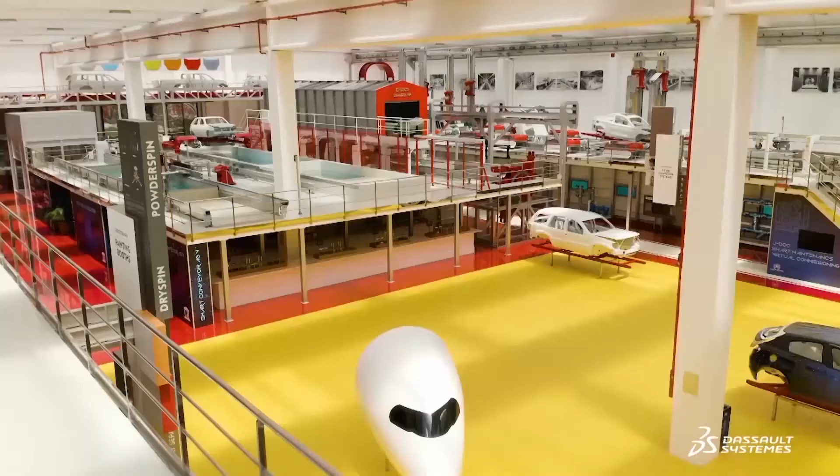Geico is a company that operates in the automotive industry. We are a turnkey provider of paint shops for automotive car bodies. Geico has been in this market for many years, for 3 generations, and one of our main aspects is innovation. We believe strongly that in order to bring value to our customer, we have to always innovate and bring new solutions to make our customer's life easier.

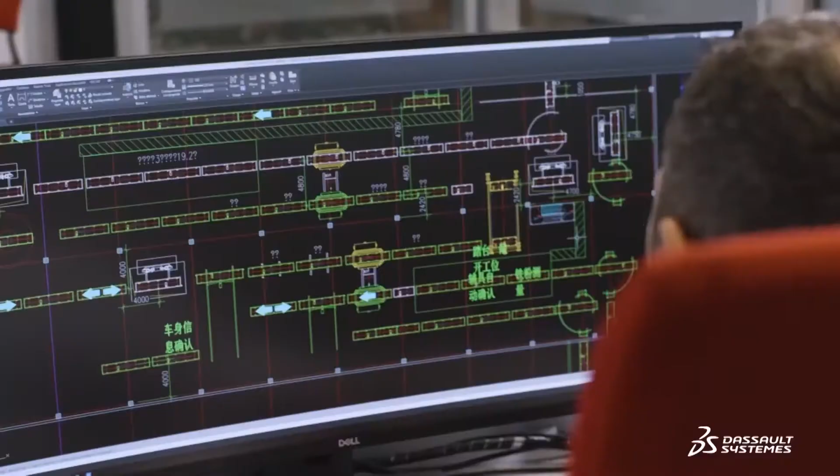This means, especially in the last 3 years, coming up with new strategic projects. In this case, particularly, we are talking about our Smart Paint Shop project. As everybody's talking today, Geico has also decided to invest a lot into the concept of Industry 4.0. What we did is analyze and check all around the world, in many other markets, not only automotive-related technologies that can be considered useful for this concept of Industry 4.0.

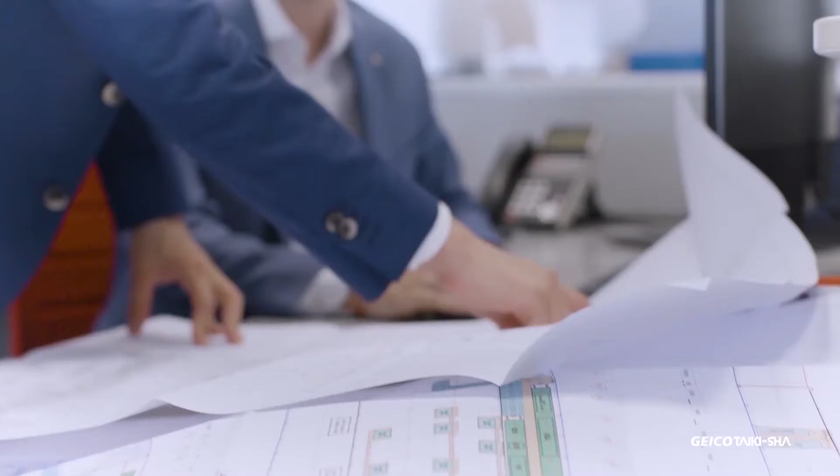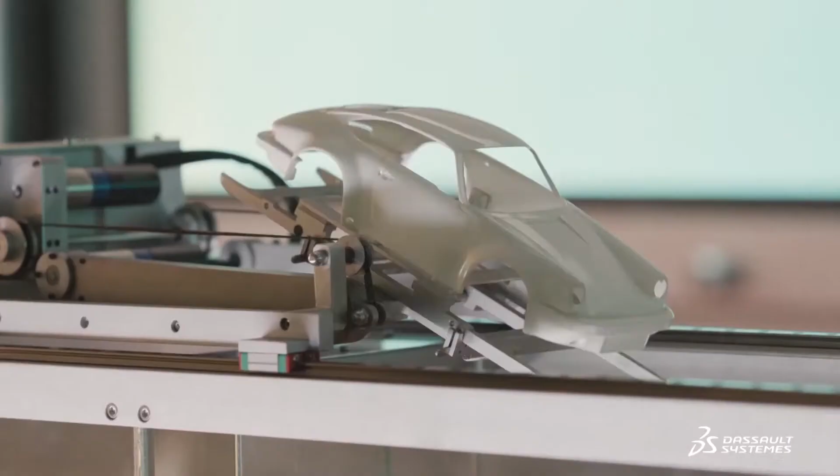This technology nowadays allows us to introduce and offer our customers a solution that allows them to manage their paint shops in a more effective way, creating much more flexibility and so on. Of course, as we all know, Industry 4.0 means interconnection, and interconnection means having a strong brain that controls and manages everything. We decided to create a very strong partnership with Dassault Systèmes in order to create our own digital twin.

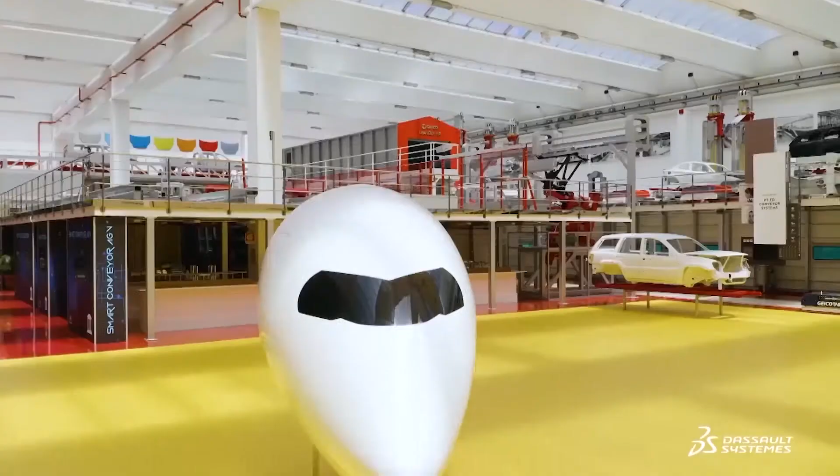This system that goes through the Delmia solutions is called PES. PES is basically the operation system of our paint shops. Now, thanks to this strong partnership with Dassault, we are able to offer not only paint shop solutions, but a full MES system for all the factory needs to build a car. So thank you very much for being here. Now I will leave you to my colleagues, who will introduce you more specifically to each part of the PES system that we are going to show you. Thank you very much.

Hi, welcome again. My name is Frank Levering. As you can see, we are still in Pardis, the Innovation Center. At this moment, we are at the start of a production day. We are going to pretend this is an automotive paint plant. With the press of a button, we are going to give the instructions to the systems behind me that we will follow for the first moment of the production day.

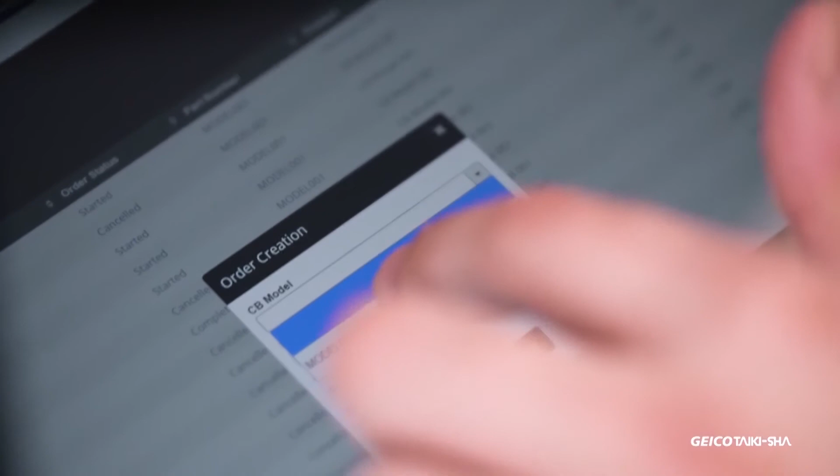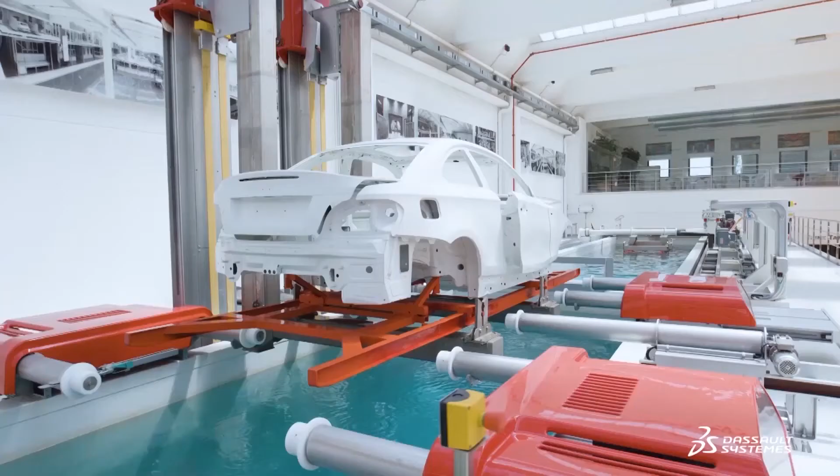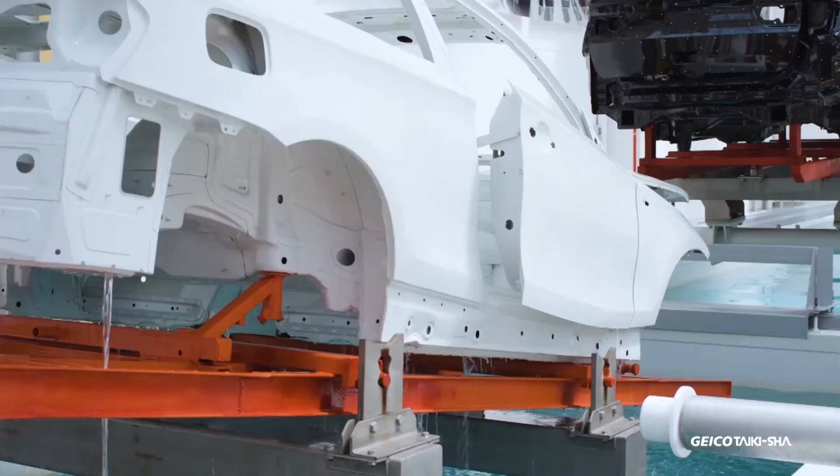So I will do this now. At this time, the instructions will be reaching all the different systems behind me, and as soon as all the instructions are processed, you will actually physically see the equipment behind me start to move. In this environment, we are able to explore many different things for our engineers. It's basically a playground where they can experiment with new features, new technologies, new designs, and execute them in real life. What we are looking at today is a combination of that innovation area, where they can try anything they'd like, together with the brain of the paint shop, or the smart paint shop.

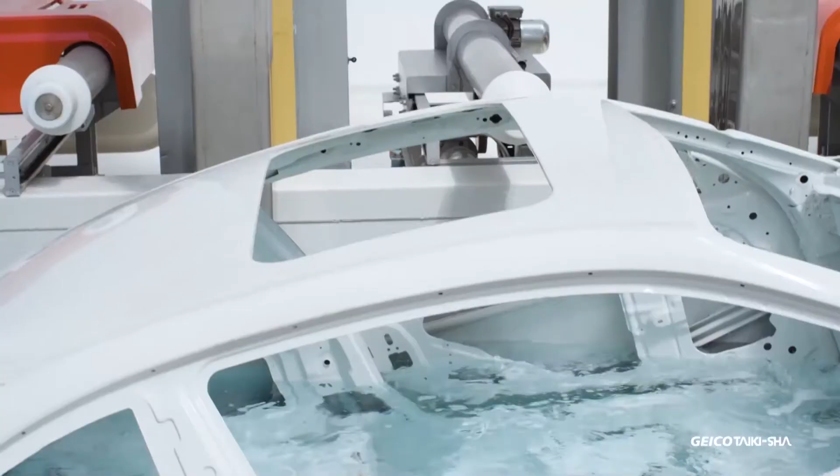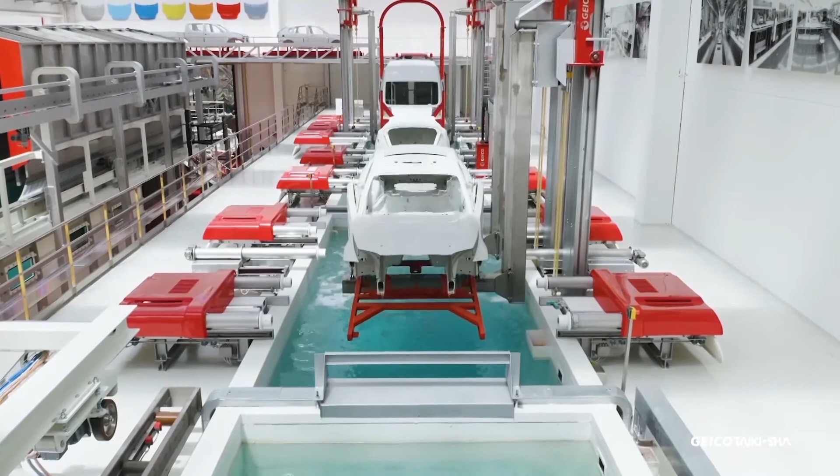In our Innovation Center, we have a rather unique situation to implement a system like Delmia. The challenge is that, as you can see, all these various processes are standalone demonstrations of Geico Taikisha's capabilities. That means the car bodies are actually fixed inside one process. We cannot make the body move like you would see in a plant, from one process to the next. Now, as this is the case, the system would not be able to recognize where a process starts and where a process finishes.

So to help Delmia understand exactly what is going on, we have allowed inside the system for a buffer zone. That means when the physical car stays in its place and simply rewinds to demonstrate the same process again, in the system the finishing of that process is considered the time to move that car into the buffer. Once the car is inside the buffer, we are then able to automatically or manually put that car into the next process. This allows us to replicate a real-life plant and the flow through all the processes as if it was reality.

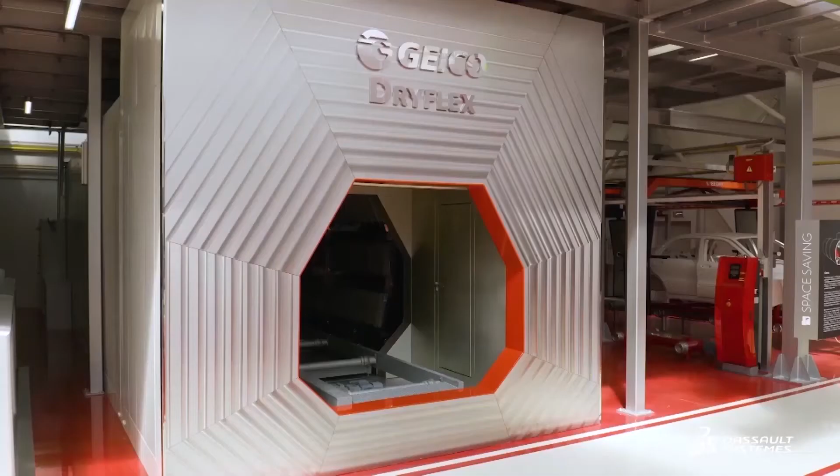Just now from the balcony, we started the production day in our environment. What we see here is the same machine we saw starting up inside the Innovation Center on the screen as a process. So what we can see here is that at this moment there are 4 cars going through different steps of this specific process on the machine we were looking at.

At the bottom we can also see in the Delmia control screen that there are 4 different tanks active at the moment to support these 4 cars in different processes. We can also hear and see behind me that that machine is actually hard at work in the physical world.

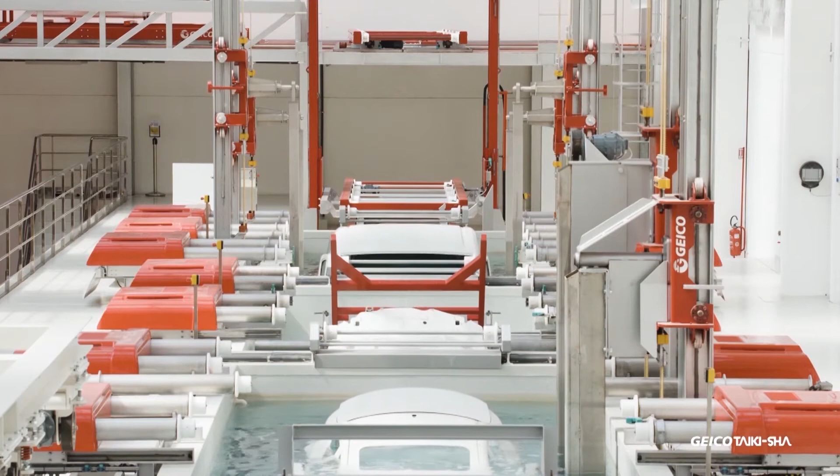Now this screen is mainly used directly on the line by people who are working in that area. It is not meant for them to touch and control, but it's meant for them to monitor exactly what is going on in this situation here. So at any point in time, they are fully aware of what is happening in the processes directly around them.

If, however, you are in the control room, you are able to go from process to process and switch this screen over to any zone in the manufacturing plant that you actually want to look at.

We have now arrived at what we will call our control room. Of course, in real life, at a real plant, it will look nothing like this. But for the purpose of our demonstration, we will be using this screen as the general overview and control of the entire paint shop. Now what we have here is the Delmia PES system control room view for all the processes in one single look.

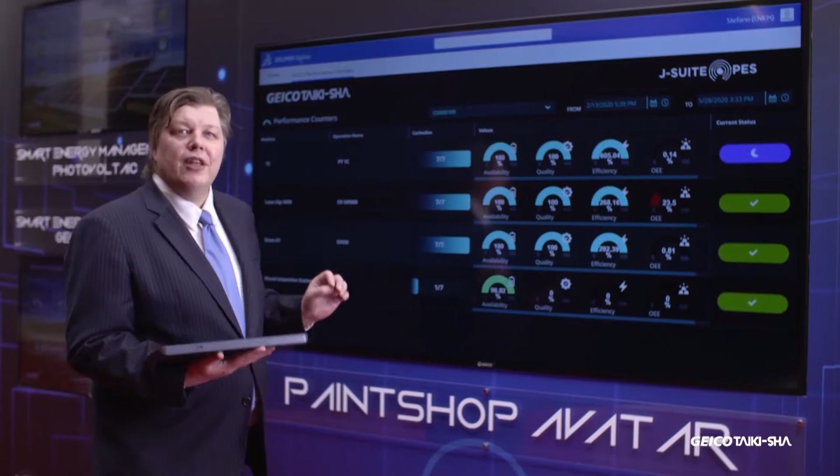So here what I can see is all the different KPIs of all the different processes in a single glance. Now if everything is perfect, the screen will look something like this. But if there's something that requires attention, it will be visible immediately in the process and in the icons that you see here, allowing immediate action and immediate ability to zoom in on that process so you can see what is going on at that point in time.

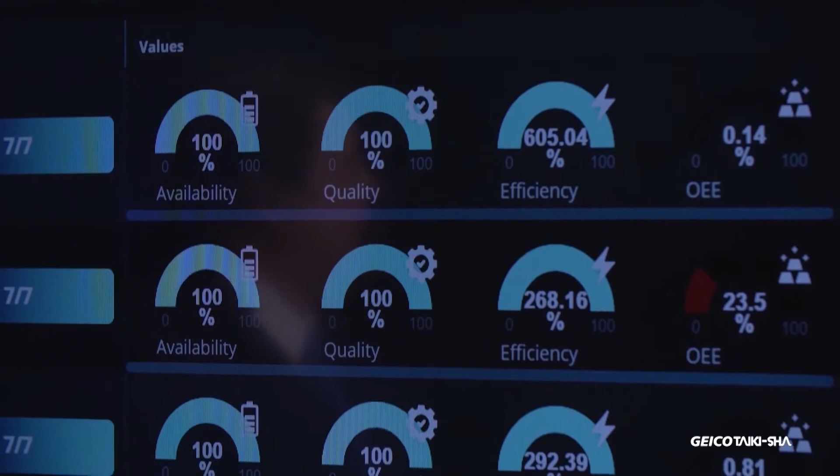So it gives you a lot of flexibility and control to be fully aware of what's happening in the paint shop. But the task of the person in the control room doesn't quite stop there. It might also be important to go and see what other things are relevant inside this process.

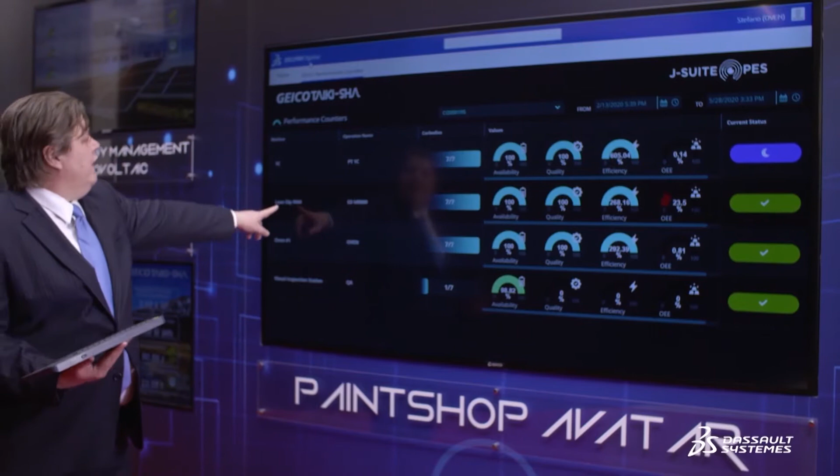As you can see here, we have the Lean Dip 9000, one of our dipping systems available, and it's actually inside this process. Now what we would like to see if there's anything we need to know beyond what we're looking at here. So we're going to have a look at maintenance from the Delmia homepage.

And we jump back into one of the PES screens, allowing us the Geico Taikisha overview of what requires maintenance at this point in time. Now as we can see, there are maintenance required on the various machines, and on the Lean Dip, that maintenance is in progress. Now let me zoom in on what is going on.

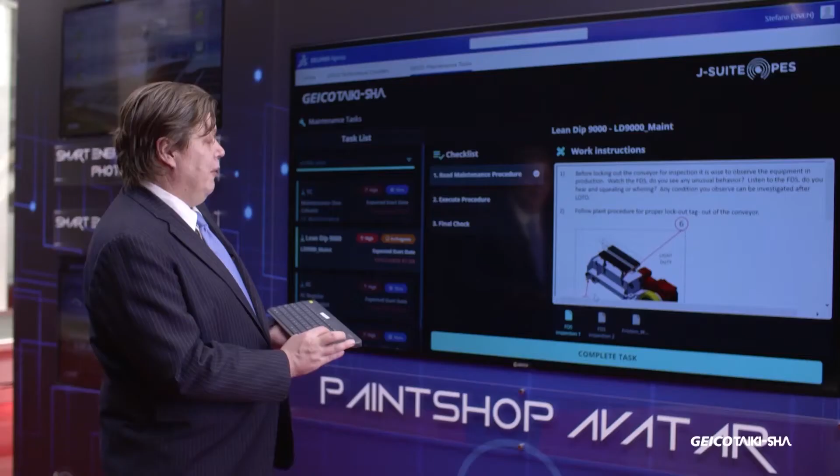There is clearly maintenance required. It is actually with a high urgency. So there's action required, but lucky for us, somebody has already read the maintenance procedure. So at this point in time, we can go and see what it is that they need to do next. So here we can see the various details of what they need to do.

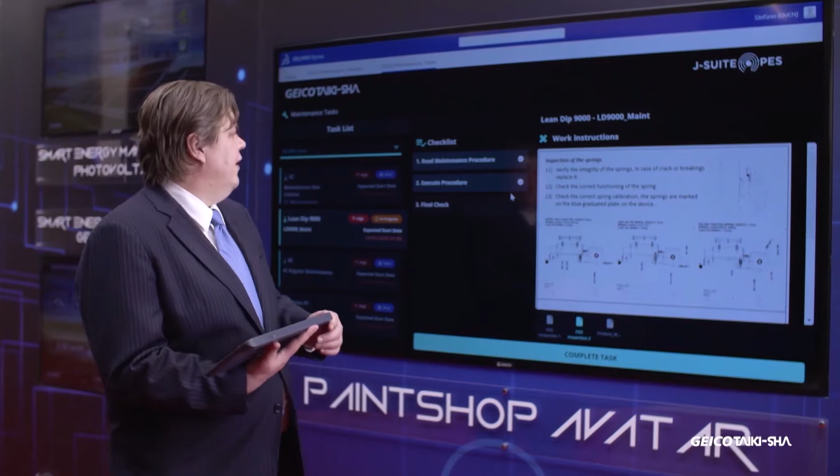Now let's assume that this person is actually already completely done with this task. So we can see what happens next. This person ticks the box and says, I have fulfilled my task. And now all I need to do is a final check to make sure that the work was actually done correctly. Usually there is a procedure to verify that the maintenance is indeed complete.

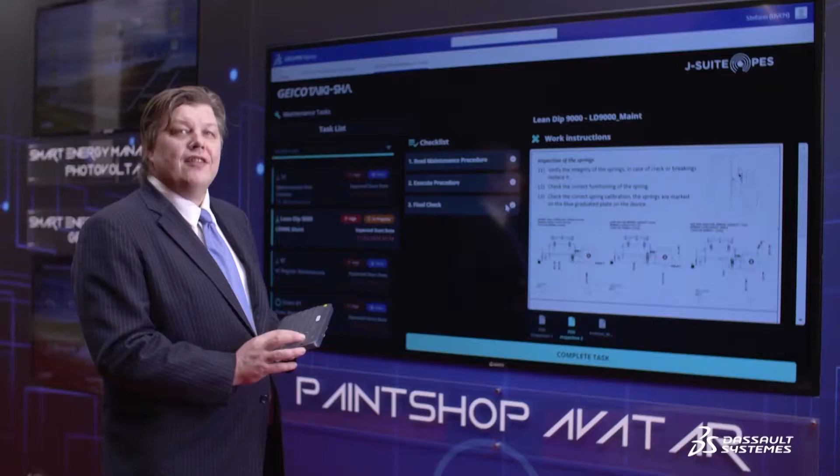So as a final check, I verify to the system that this task has also been done. And from here, I can now consider this task complete. And the moment I do that, it will disappear from the maintenance record here. And is now marked complete.

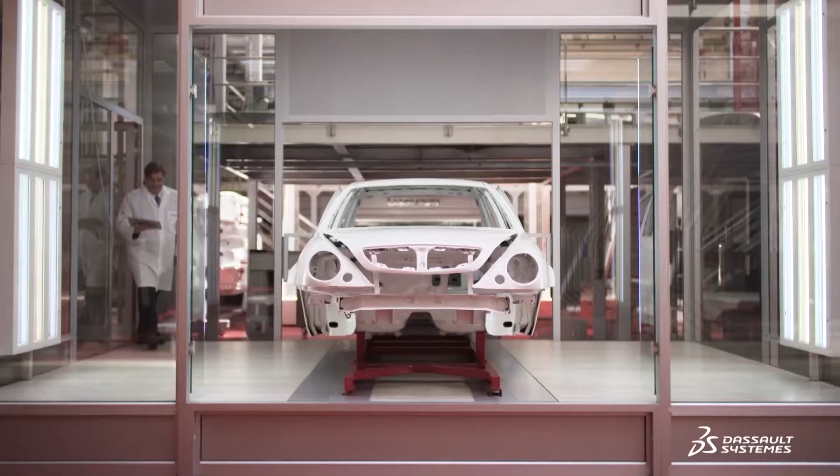Welcome to the final inspection station. What we will do here is that I will perform a visual inspection of this car body to find any defects. This allows me to pinpoint if there is a problem with this car or if it can be released to the end of the line. Give me a moment while I take a look.

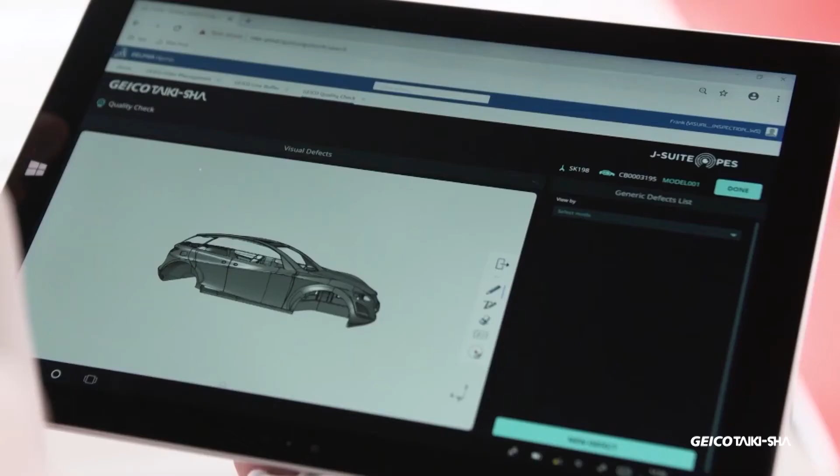Okay, for the sake of our demo, I have found a small problem. I am now going to mark this in the system so that it gets tracked on this car body. I am going to mark on the car body where I have found the flaw, which is here. And now I am going to add the new defect.

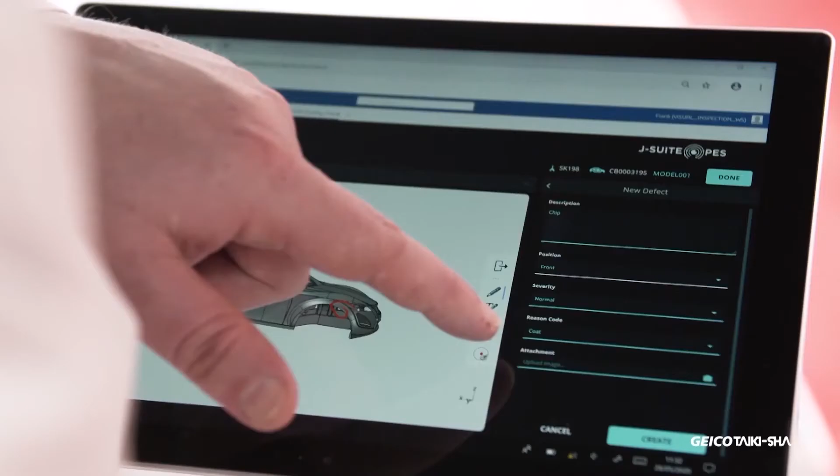First, I will need to add a description, which I will call chip, because the paint is chipped. Then I will indicate the position in the front, and I will indicate the severity of the problem. Let me make that minor. And from there, I will add this to the car body logbook.

In the system, every step throughout all the processes in the paint shop are tracked for this specific car body. You now get the full overview of everything that might have happened in these processes that the operator needs to know.

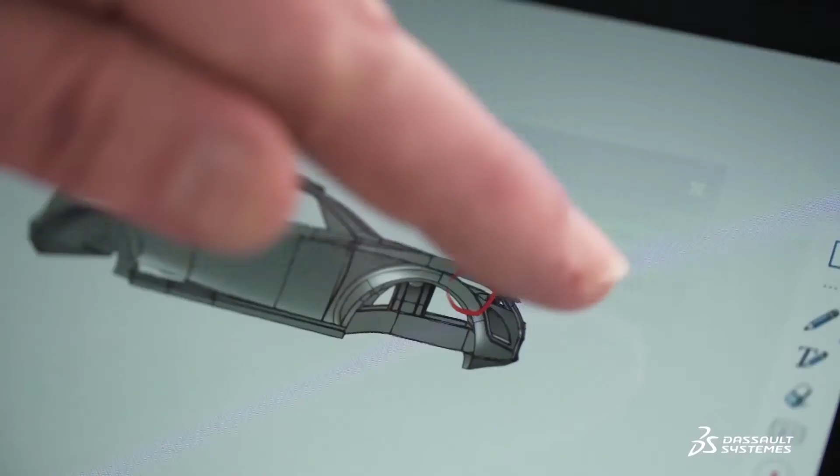That is sent, and we'll now be able to take a look at the car body logbook. If the car has no problems at all, it will simply proceed to the end of the line and go to the assembly shop, where all the parts will be put together to make this a real car. If this problem requires further attention, it will be taken to the process where the action is required, and it will be made ready to also proceed to the end of the line.

During the quality inspection, you heard me mention the car body logbook. Let's have a closer look.

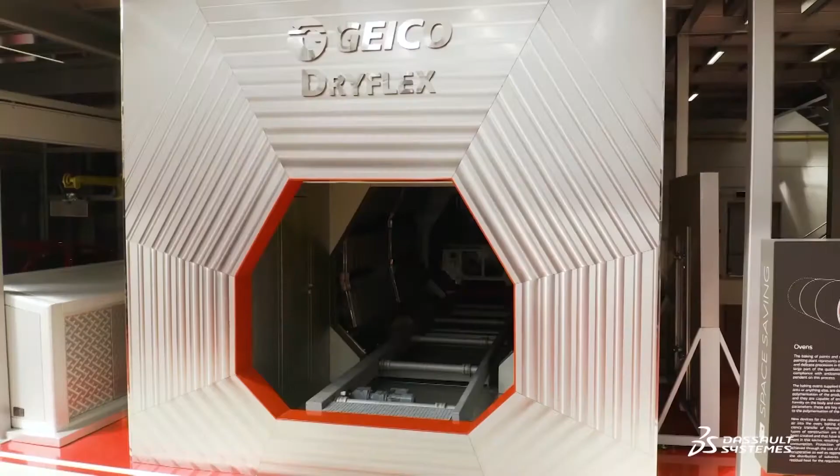In the car body logbook, you can see that every car body has a unique identifier. This allows us to track very precisely everything that's happened throughout all the processes in the entire paint shop. As you can see here, we have captured some data that is relevant for somebody to evaluate the processes this car has gone through. And of course, we have done the visual inspection ourselves.

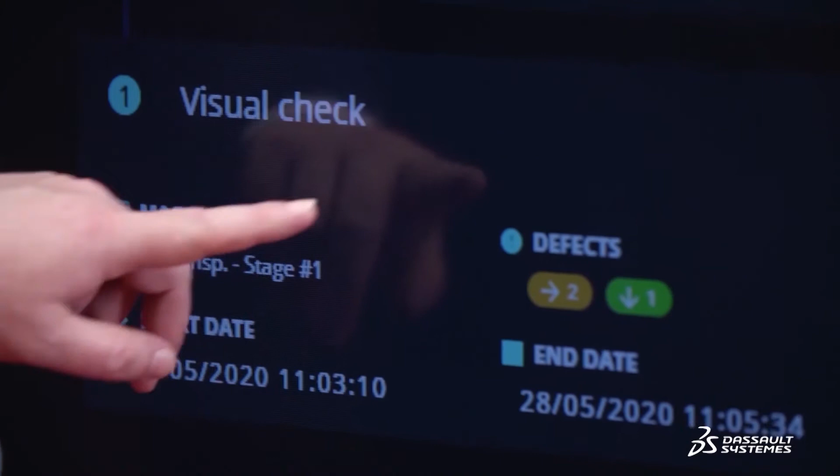During this process, in the visual check, we've been able to capture two defects, and they are indicated as not so severe, or minor. You can also see that there is a start date and an end date to this process, allowing somebody to verify that the quality process has taken place in the correct manner.

With this, I would like to end our tour and thank you on behalf of Dassault and Geico Taikisha for your time and attention. So here we are behind the scenes of Geico Taikisha.

I promised you that Guillaume Vendroux would stay with us. I have a question for you, Guillaume. It's nearly too easy a question. Why did Geico choose DELMIA Apriso to ensure its transformation?

Well, Geico had a need to change their product offer a couple of years ago, and they really wanted to change the way their systems, their painting lines, were operating. So they launched a call for tender, we answered it, and we won it.

So what are we offering to Geico? Well, we're offering them a way to better operate their lines, to have better traceability, visibility on the performance of the lines, synchronization for the different activities which need to be carried out at the same time, so improved performance for their customers.

So this is a quite unusual situation. Geico doesn't use the solution to make their own lines for themselves. We're working always together so that Geico's customers themselves have the ideal solution.